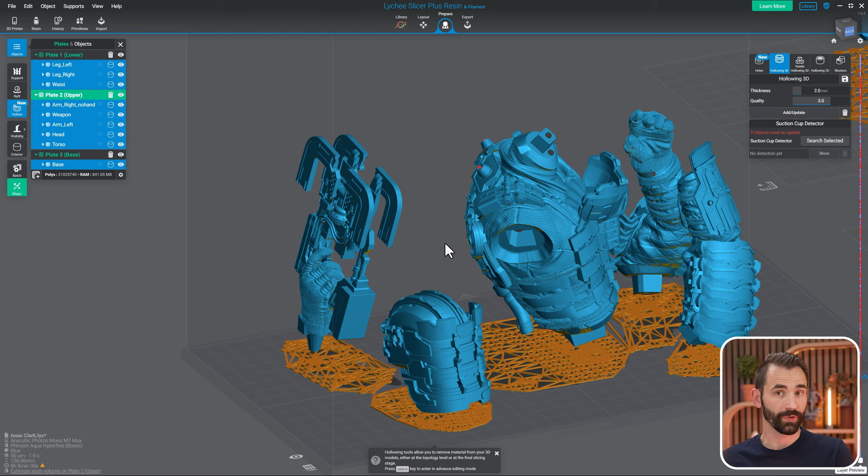Rule number 1 is making sure you can properly identify what objects are worth or not worth hollowing. To do this, what I do is I just hollow everything. And then I click on interior, exterior right here, and I just kind of look at stuff.

And this gun right here is one where there is a lot going on with the geometry. It's rather thin, it's rather complex, and this would be an example of one I wouldn't hollow. So on the gun right here, I just select it and delete the hollowing and then just move on to the other objects.

Rule number 2, make sure we place hollowing holes on the top and the bottom. I don't mean the top and bottom of the model, I mean top and bottom of the individual component that we're hollowing as it is orientated in the slicer. So when looking at the helmet, what we can see is that the top of it is very, very visible. You can see here when I'm looking at it, it's very, very visible.

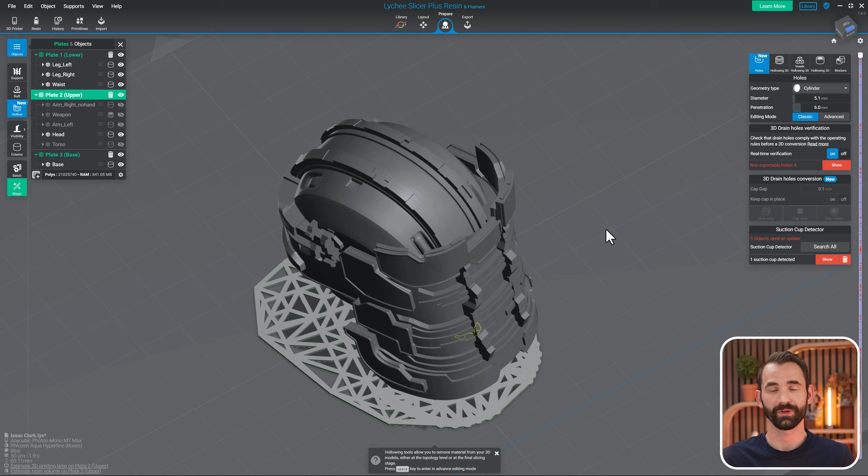So I don't want to put hollowing holes on top of it because that would cosmetically cause too much damage. But I want them as high as I can because it's going to make cleaning this part really, really easy versus really, really difficult. And remember, if we don't clean it properly, it can explode and off gas. So what I did here is I snuck one hollowing hole right behind the visor where you can't see it. It's also going to be really easy to repair and fix.

In fact, I did a video on the frozen UV clay. You can watch that video here when you're done with this one if you want. And that really made it very simple to clean up some of these smaller holes cosmetically.

Rule number 3, make sure when we're placing our hollowing holes on the bottom, they're either large enough or there's enough of them to prevent suction cups. These ones at the bottom are really, really important. This is because we need resin to flow in and out of this model during the print. If we don't do this properly, we're gonna get suction cups.

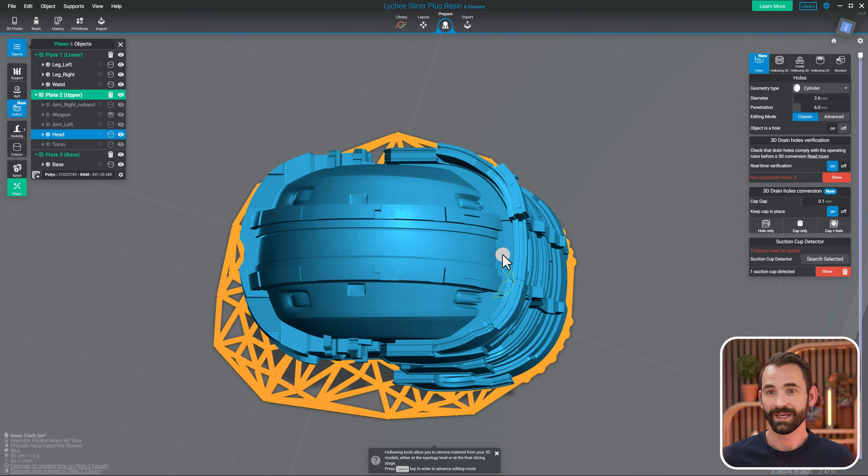We do not want suction cups as that pretty much creates peeling force. And remember, one of the main reasons that we're hollowing outside of saving money is to reduce peeling forces. And if we don't get rid of the suction cups, well, we're bringing them back. So make sure at the bottom, not only do we have enough holes, but they're large enough. If you have certain parts of the model where you can't put a big hole, you can do lots of smaller ones to make up for it.

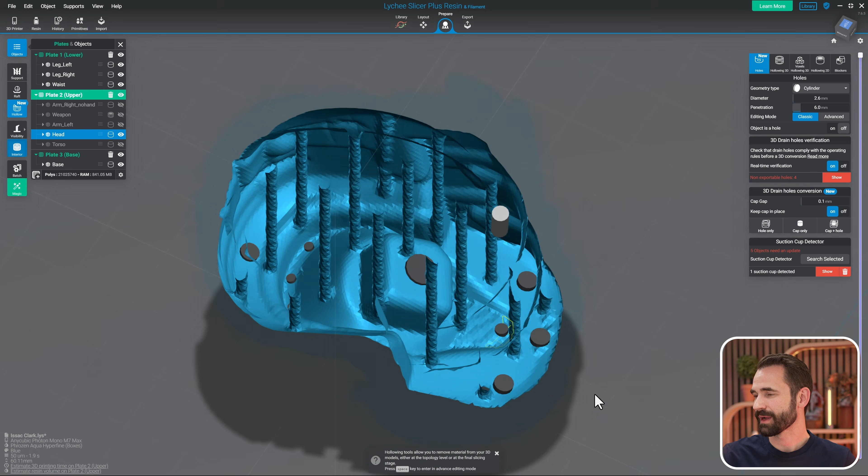Here's an example where I am using different sized holes in different places in order to make up for where I can't put a big one or a small one. To see what that looks like from the inside, let's just change that around. We can turn, and you can kind of see why I made some of the decisions I did when I placed hollowing holes on the bottom of this helmet.

I see too many times where they'll place maybe one on the key here, or maybe just one down in a spot like that one and call it good, but just a small hole like that one is not enough. You're gonna need multiples, and just hide them the best you can to prevent suction cups.

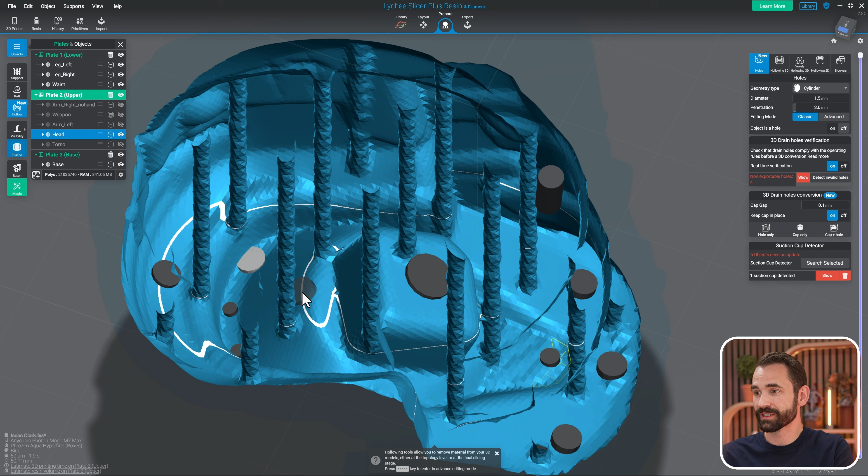Rule number 4 is that you don't have so many hollowing holes or holes that are so big that you pretty much created Swiss cheese and there isn't much model left to actually support itself. I've seen this way too often where, for example, let's say these back holes right here. They're just really, really large, like something like this one, or something like the key. It pretty much takes up the entire key so it has no structural integrity left.

Or on the bottom of a base, there'll be this massive hole that takes up 50% of the bottom of the base. You need enough material to actually build the entire model off of and to put internal structures and supports on. So don't overdo it just because you're afraid of what I said earlier about not enough resin flow. Find that balance between enough holes for resin flow, but not so many that you've created a Swiss cheese model.

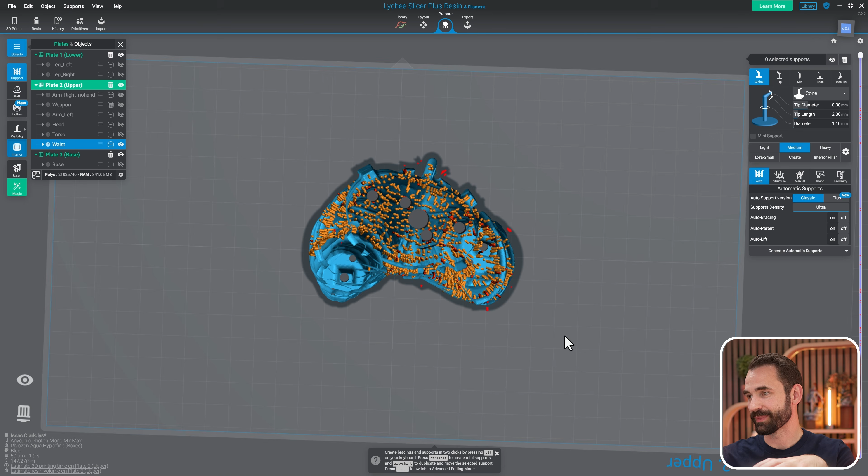And rule number 5, make sure to support those internal islands, but don't overdo it, defeating the entire purpose of hollowing in the first place. Way too often do I see stuff like this. You'd be surprised how often I see that. I mean, from the front, it looks pretty bad. From the top, you can see it's not as bad as it seemed, but you'd be surprised how often I see interior supporting that looks something like this, to a point where it's like, why did you even hollow the model in the first place?

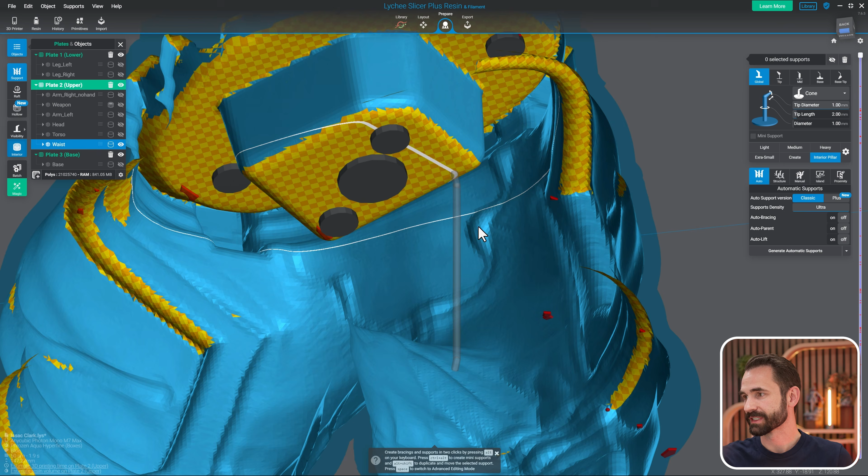So we don't want to see this. What we want to see is supports, but where it makes sense. For that one, what I do is I use the interior pillar, which is basically a support where the top and the bottom are the exact same thickness, so 1 millimeter all the way through. And that just looks something like this one. You can kind of see it doesn't taper down. This offers a lot more support structure, so you don't need as many.

And I just go through, and what I like to do is just manually add them to the islands, or something like a very large key like this guy. Just go through and add around the edges and a few in the inside. And that's gonna prevent that key from flattening out so that there's some structure for this chest to go in the key for the pants, so everything fits and it's all very, very stable. You can also use the new Lychee Pixel 3D hollowing, where it pretty much adds support structure shafts for you, making that even easier. And let's just do one more quick example of what these first 5 rules look like.

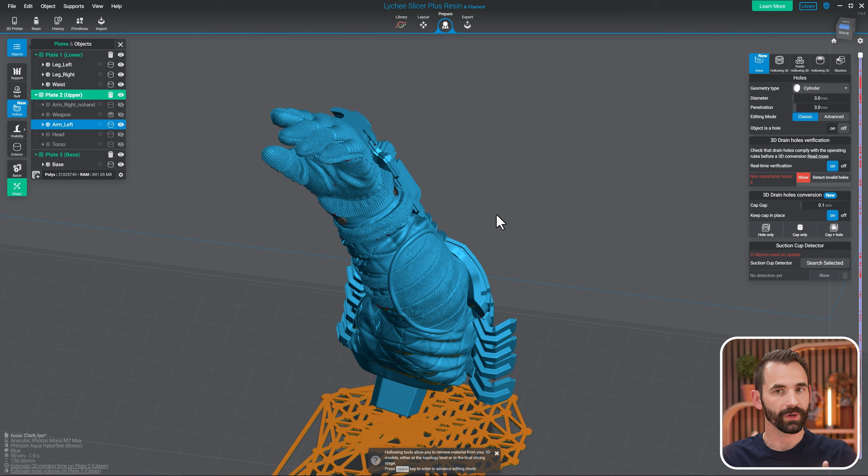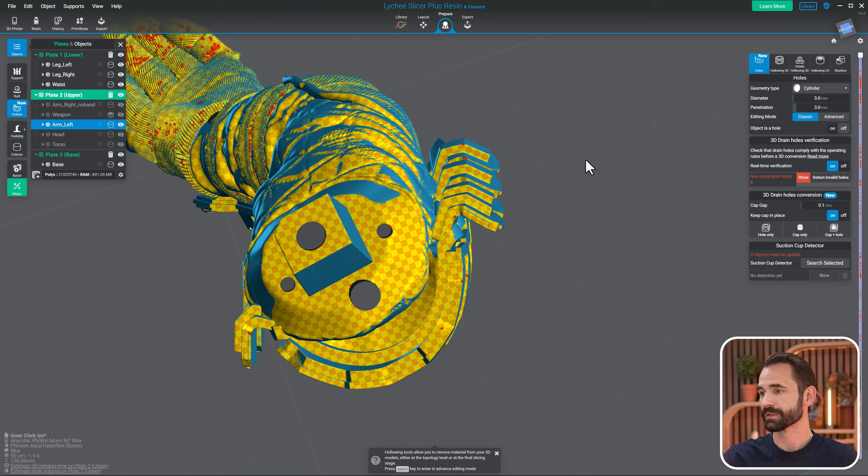Let's use the hand. Now the hand's rather interesting, where I couldn't put any hollowing holes on the fingers, but if you look up here, they are hollowed out. I could put a blocker in here and just block it out, but I want that resin savings. So what I ended up doing is just sneaking a couple hollowing holes in the wrist area, where they're gonna be less visible and a little bit easier to see. And then as far as the bottom goes, I just got a couple here on the bottom, just large enough and a little more spread out so there's enough material to build the arm off of for supports, but also enough where this thing doesn't fail and we're not creating any suction cups.

I also snuck in a few other places just to alleviate some pressure here and there while I'm doing the print. Again, just places where you can kind of sneak them. Don't overdo it, but there's a place where you're like, you'll never notice that there's a hollowing hole here. I don't even need to fix it. Just squeeze them in there and it's gonna make cleaning that much easier.

And rule number 6, the last rule. Make sure that you use the correct wall thickness for the type of model you're printing or the part that you're printing. As an example, the chest and head and arms, those can be down to 1.8 or 1.9 millimeter wall thickness, but possibly the feet, the legs, maybe even the base, I might go up to 2 or 2.2 millimeters wall thickness just to give them a little extra strength. Following these 6 rules, I think you're really gonna enjoy the benefits of hollowing your resin 3D prints without pretty much any of the cons.